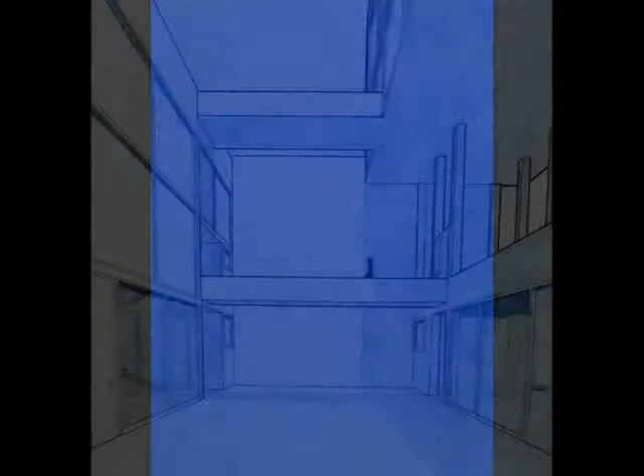The project I present was about designing an artist's house, where life and work could share the same place harmoniously. The client was specific. In my case it was Klein, an important and recognized French conceptual artist with very specific tastes and likes, besides a totally unusual way of thinking and acting. He developed an interesting idea about immaterial matters and a love for something he called the void, a sort of emptiness deity that rules the connection of the body with the spirit, in his own words.

The plot was back-to-back to three other constructions, like a row house, with only a full facade, which looked to a central square. It was 12 meters wide and 16 meters long, with a maximum height of 12 meters and a possibility to dig 4 meters down. The minimal program of the building included the spaces of access, gallery, studio, teaching rooms and dwelling, besides services and distribution.

With all this information in mind, I started to think of how the house was going to be, and I had an idea that would rule the entire design. In one of his polemic performances, in which Klein used naked models as living brushes, he explained he tried to distance himself from his own art, with the purpose of keeping himself clean. That, with his concept of the void, was expressing a simple solution.

Two volumes as far from each other as they could be in the plot, one as the dwelling and one as the public part of the building, with gallery, studio and teaching area. The first one would fly up in the air, his life being pulled up by the void, and the second one that resembled his art would be in contact with earth.

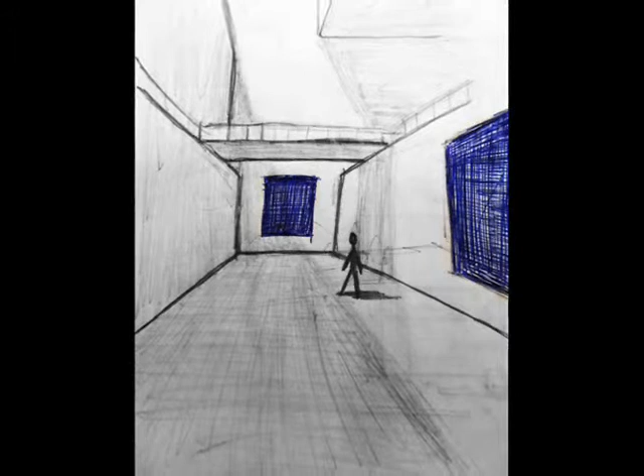The most beautiful result of this solution is the big empty space between the volumes. It lightens and gives fresh air to the entire building, and it's necessary to pass through it for entering and leaving the building, as well as for going from personal to public spaces.

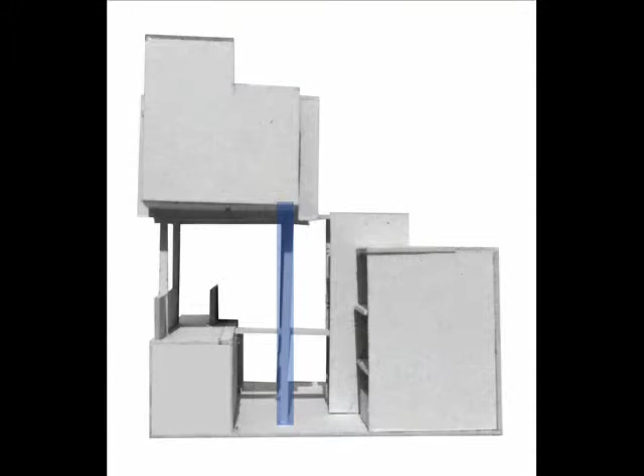The structure, steel framed but with different span sizes, was a challenge, not because of the size or the weight of the building, but because of the purity of the spaces, which were almost destroyed with every column I placed. Finally, I understood that I had already placed an ordering system that ruled the building. The light and delicate bridges that crossed through the space were part of it, so structure could be a part too, and finally the entire distribution system was placed on it.

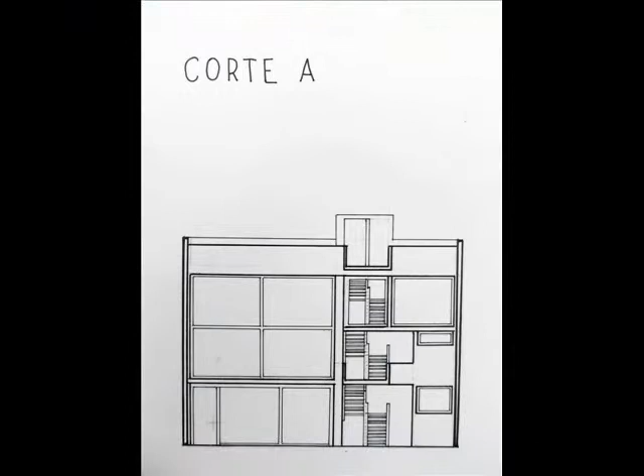This straight axis talks about the personality of the building's owner and his work system. Repeated and systematic, his art becomes almost scientific sometimes. Besides, this axis gives hierarchy, served spaces at the left and serving spaces at the right side.

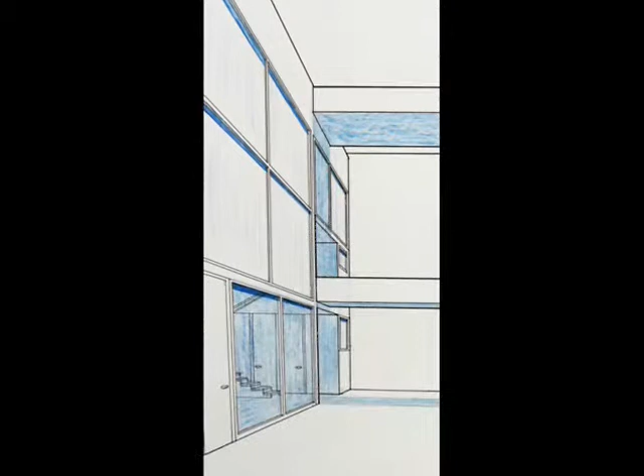I imagined a pure white house in which Klein could be free in his art, where no colors besides the blue of the water and the sky could disturb him. Those materials had to be pure and clean: steel, painted reinforced concrete, and glass. I took advantage of glass, using it in curtain walls that let the light through into the building and made its volumes visible, but minimizing reflection by placing it right, looking only to the north and the south.

Solving each of these factors, Klein's needs, structure, materials, form, order, and giving the design something else, that is, my own understanding of Klein's art and my own beliefs, serves this solution, just one of infinite possibilities of the result of designing an artist's house and studio.